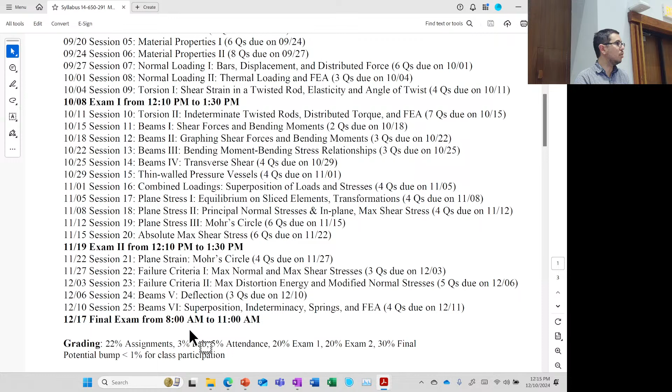As we were discussing casually a few minutes ago, my advice for the final exam is the same as before. Please look at the previous exams, please review them. If there are things you don't know, if there are steps you'd expect questions on, the steps on how to go from this to this to this, send a message in the GroupMe, send me a message over Canvas. We've got some time, try to communicate and work through any bugs there might be. I'll say that if you go all the way back to 2015, there are still some bugs in one of those exams, based on some of the beam bending stuff we're covering today. So if a few things look a little funny on boundary conditions, it's okay, the solutions were a little wonky and I haven't gotten back to fix them. There may be other issues. If you have other questions about the solutions, just send me a message, and we'll hopefully clarify anything you're struggling through. I do want the learning to continue.

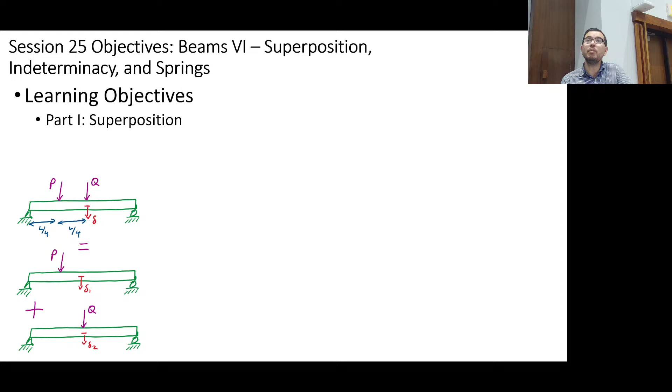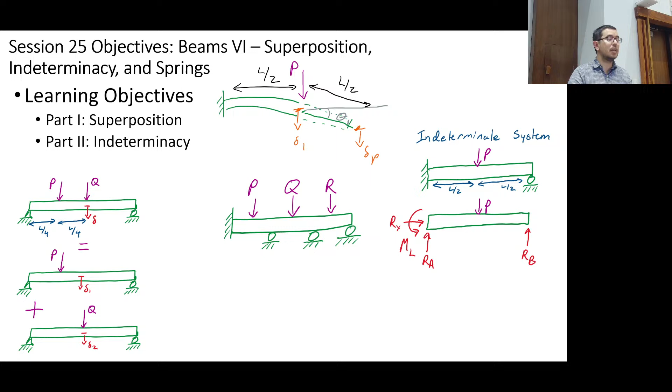Let's go. Our objectives today are to discuss superposition yet again, but now in the context of beam bending. We will also discuss indeterminacy and indeterminate systems. In some respects, these topics will be a bit of a review of things you've seen previously.

And then the last topic will be thinking about beams as springs. And yeah, if we could just tone it down a notch upstairs. Thank you. All right, awesomeness.

Okay, so I'd just like to emphasize for a couple minutes again why these topics are so important. Many of these things will be in tables. When it comes to understanding what the elastic curve looks like, you should find it somewhat familiar.

I don't think as an engineer you're often going to be asked, unless you're trying to get the job interview or the job, to calculate deflection curves. You may be given this type of sketch and asked to tell me what the bending stress is. It'd be a stretch for most job interviews to ask that, but handling beams is something you want to be able to do.

You may find yourself designing a particular tool or thinking about the end effector on a robot and how much it's going to be deflecting downward based on the weight distributed across it, because of gravity acting on that arm, or the type of load you're picking up. Having this general concept that bending stresses are going to be highest here at the torso, or where the arm connects to the rest of the body—having an idea of where to look to find out what the bending stresses are.

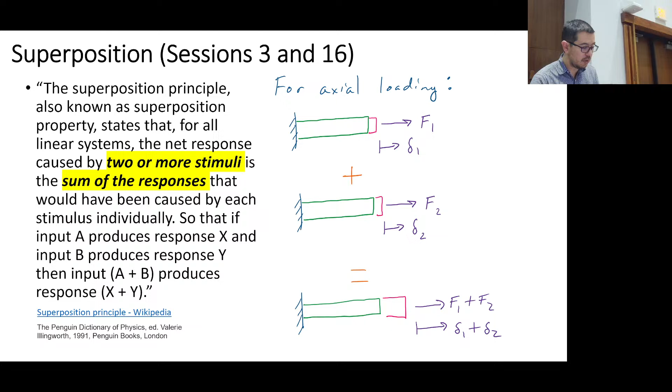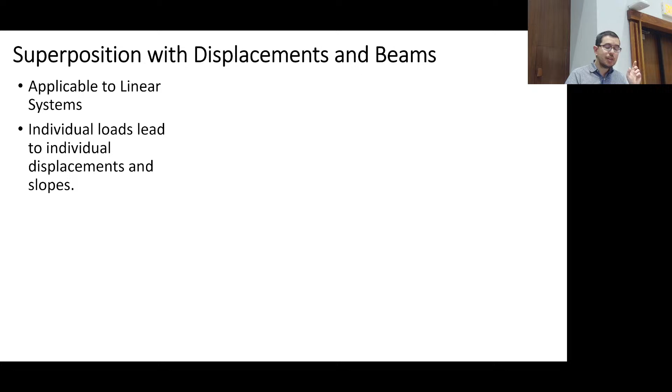Now, how do we do this with displacements and beams? We need to not just consider... So the nice thing about bars is that in many cases it's just extension, right?

But do you remember that problem, probably in session 4, where we had those bars hanging and there was a rigid beam, and then there was another bar hanging, and that rigid beam would rotate? We didn't even say it would deflect, right? But it would rotate, and then that made everything a lot more complicated, right? And there's a whole Python script to handle that issue.

Okay, in a regular beam, we have now understood from last time that it's not just displacement, but also slope that we have to keep account of, or track. So for that type of situation, it can be important to remember...

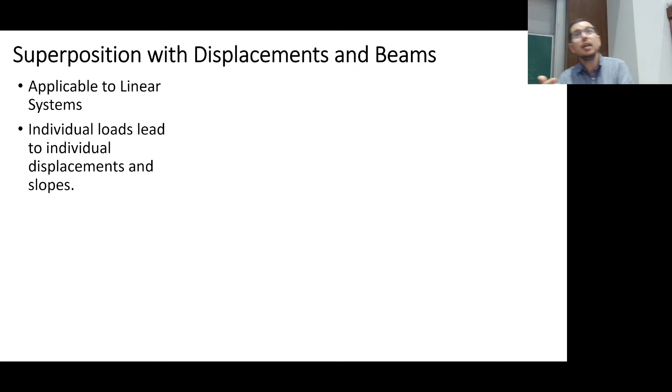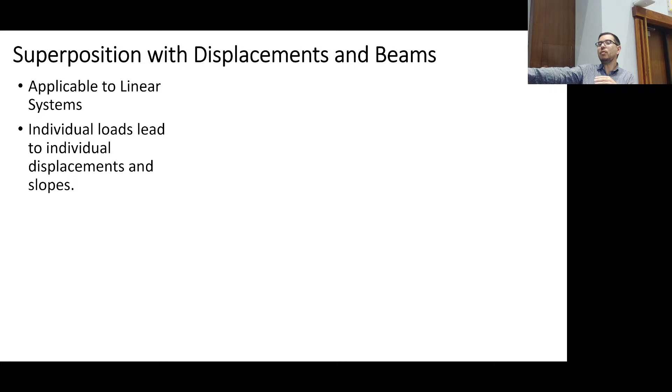When I have a member that's at an angle, even if there's no additional deflection, like no curvature here, right? If I have a slope at this point and there's no additional curvature, this point is obviously lower than this point, or this point is going to be higher than this point. But I can calculate that out. I can figure out how high or how low it is based on the angle at this joint.

So when we do superposition, it's not just going to be, okay, add this displacement to this displacement to this displacement. It will also have us think a little bit about where that endpoint is out there. Even though, as I say, there are often members that have zero bending stress, zero shear stress in them, and they're just along for the ride. But geometrically, being along for the ride has significance.

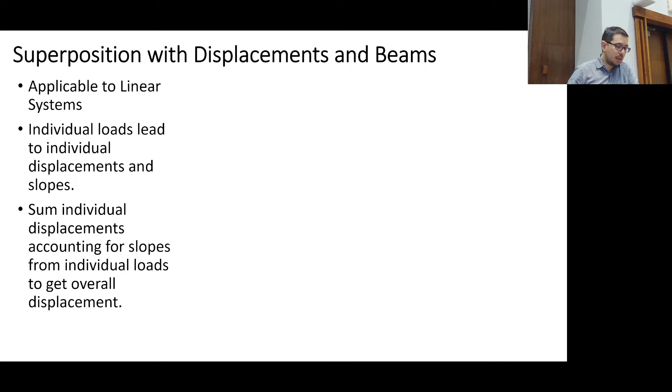So we'll be able to look at some of these, sum of individual displacements. We'll have to account for the slopes from the individual loads also, to get overall displacement.

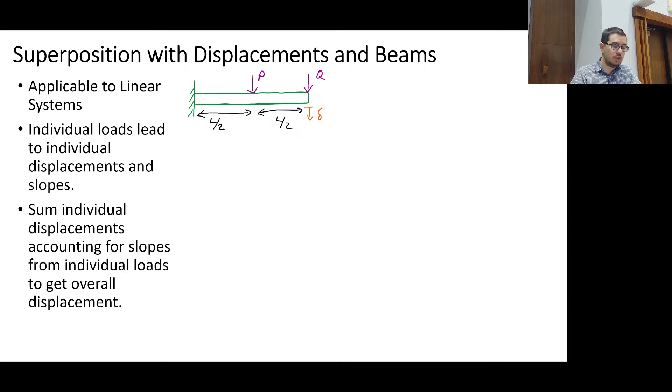Here is a beam that has two loads on it, P and Q. These are concentrated forces. If we want the displacement at the end, how would you go about breaking this up? Just quickly, how would you go about breaking this into a problem that's maybe a little simpler? I want the displacement at the end. Yes? Break it up into two sections, so you do the deflection for either section of L.

Okay, so that's interesting, that's one way to do it. Now let's think if I have tables. I don't want to do it like that - I have little expressions that tell me the deflection along the beam, and I also have tables that show me the slope. And I don't want to do any equilibrium. Now, how would you take this thing and break it down? You don't want to do the method of sections if you don't have to. Yes?

Deflection by P and then deflection by Q. Right? So I could look at the system in terms of the deflection at the end due to P, and then also look at the deflection at the end due to Q. And if I have tables for those two values, I'm kind of done.

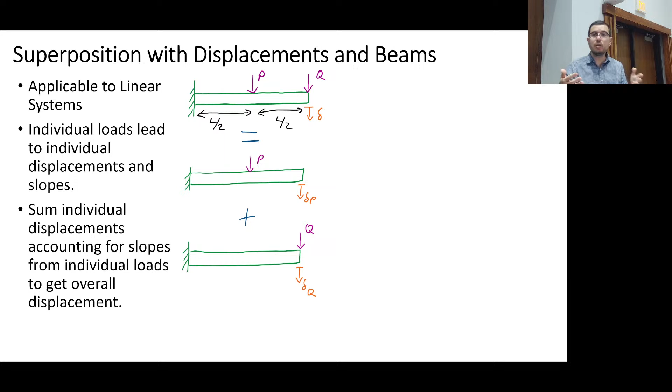But what we're trying to get here is that there are ways to essentially not cheat, but not do the EI second derivative of little v versus x equals m, all those calculations, if you already have tables. In a cliche way, we're trying not to reinvent the wheel every time. That's what we're doing. So here we can say that delta is equal to delta P plus delta Q.

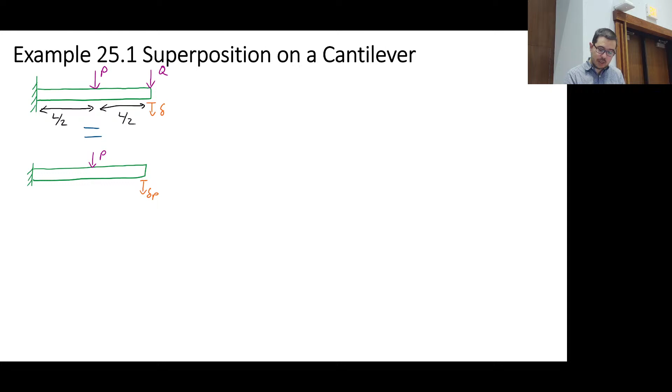Okay, so superposition on a cantilever, right? Same problem. Now let's go into a little bit more detail of how this works. So we're going to, once again, say, all right, I want to know what the delta P is, the delta due to that P at the end of the beam, even though P is not at the end of the beam. And we want to know what the delta Q is, even though the Q is right on top of the delta Q. So anyway, it's not really that relevant.

But this one, you can kind of see, is exactly like this, right? Everyone hopefully can see that. So that Q, I just pop in Q, and that's my displacement at the end from Q. Yeah, and of course, this is a little v max. That's how we often write it. And we would write this as the little v as well, okay?

It's important, though, to be able to take information from tables, and even though it's not using exactly the same thing that you've got in a textbook or you've seen before, you can infer. I think that's one of the things that's also probably a little bit hard about this class, because if you look at the previous exams, some of them are hand drawn, or they're just pretty simple diagrams—no shading, no real fun things like from a textbook. But I don't know, I think some of us, if we saw the textbook problem, it'd just be soothing and comforting, and we'd get less stressed or something. But it's important to be able to make that jump.

So now, this expression right here, where did this one come from? This one comes from right here, okay? So this is the px squared times quantity 3L minus x over 6EI. This is just for the cantilever, right? So once again, we write it out, and that's the expression. And notice I didn't put the negative sign there, so I just got to be careful. I know that's going to be downward for this particular problem.

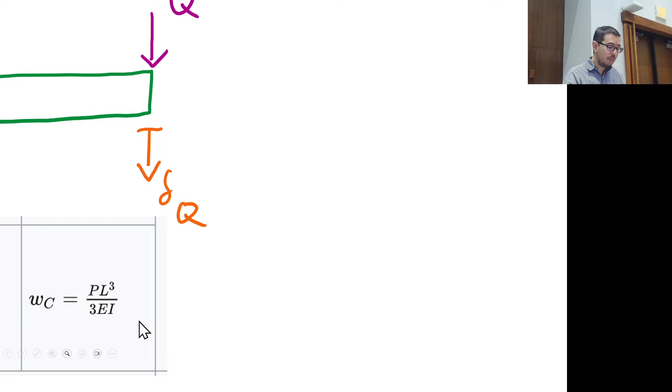This equation is when we plugged in the total length of the beam, L, right? And this equation is the maximum deflection at the end of the beam. All right? I have now essentially taken this problem to be an entire beam, but it has length half of what it used to have. Okay? Do you see this? This is important. You want to be able to visualize this a week from today.

Okay? Because people will plug in L over 2 into one of these 2 equations. But do you see how plugging in L over 2 into these equations is just taking this problem and figuring out what the displacement is here? I don't want to know the displacement. I don't want to know the angle here. I want to know the angle here when P is being applied on a beam that's half the original length.

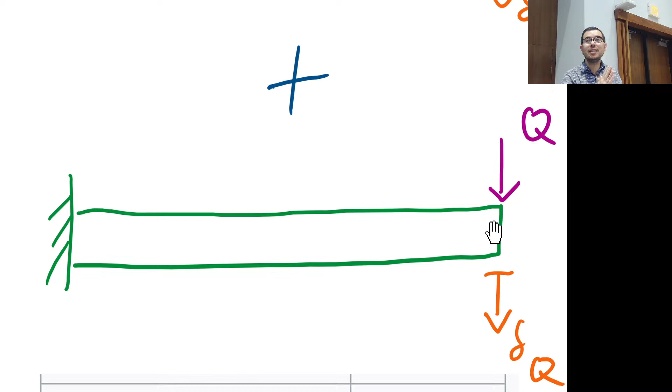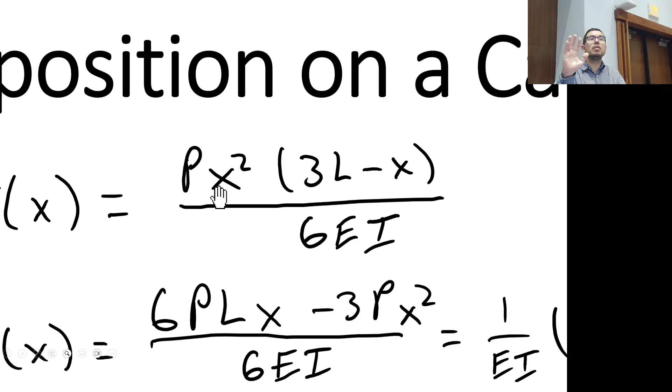Okay? Am I making sense? All right, so you could do a couple of things. You could say, oh, I'm just going to plug in L over 2 here, and I can plug in L over 2 here, and L over 2 here, and that would give you the right answer as well.

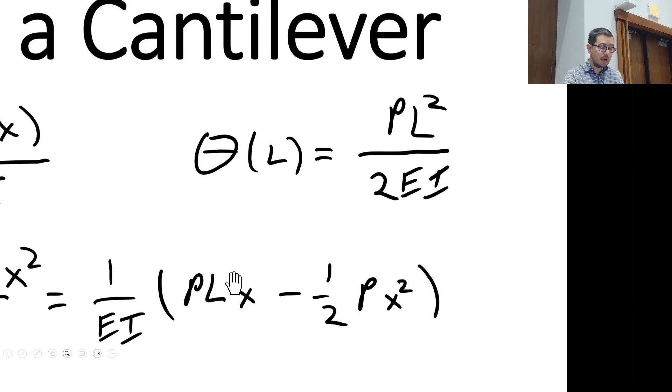Okay, but you got to switch this L over 2, this L to L over 2, right? But this one, it's already done for me. This is the slope at the end of the beam as well. We're going to use that in a second too, all right? This one, not done for me, okay? This one is still using a beam of length L, not beam of length L over 2, okay?

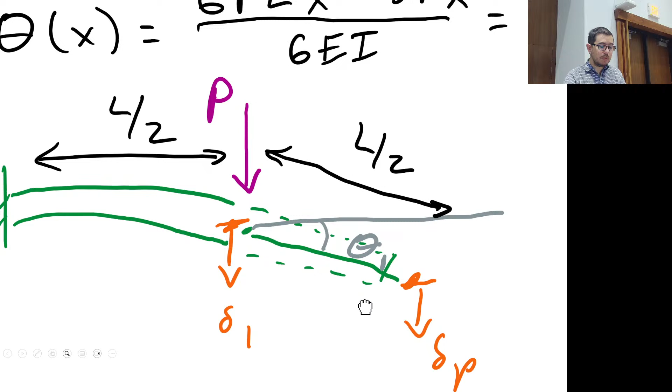This one down here, like we said, this one will give you the maximum displacement, which is what you want for a beam of length L over 2. Okay, it's a little bit of a mind bender. Okay, this is maybe not how you think of superposition. It's an opportunity to expand.

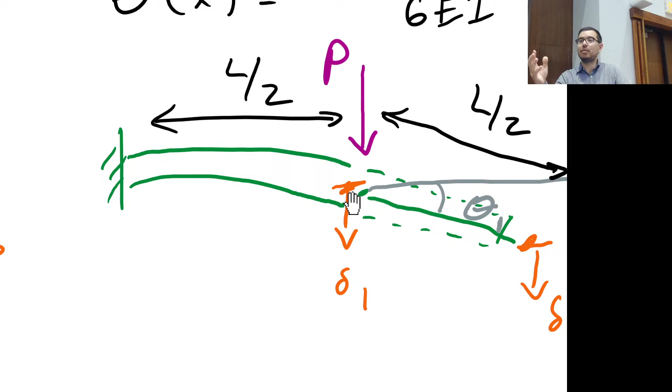Okay, now, what's the other important quantity that we need here? Theta. All right, we need the theta. So we got to be careful here when you calculate it out, because theta, right, it has like a negative slope. Okay, so whatever, you can say, well, if it's a positive number, just make sure that you're thinking that it's going further down. Okay, so you're going to add whatever you want to do. You want to get to delta P, you want to take this value and then add to the additional displacement that comes here.

How do we figure out what the vertical displacement is? If I know this angle, how do I figure out what this additional... so this, from this gray line to this point here, how do I figure out what that value is? If I know theta. Yes, Stephen.

Oh, it's okay. It's okay. This is the first time we're doing this. Others? Mark? Okay, so you can do it, yes, in terms of sine theta, all right, if you want.

But sine theta equals what? Sine theta would be equal to this opposite side, right, over this hypotenuse, right? And what's that hypotenuse? L over 2, right? That's the hypotenuse. Okay. Now, in reality, if you wanted to do tangent of theta, you could too, because these angles are typically small. Okay, so there's not going to be a big difference. So if you said tangent of theta, that's this divided by this length, and you said this adjacent side is about the same length as the hypotenuse, you would be fine as well.

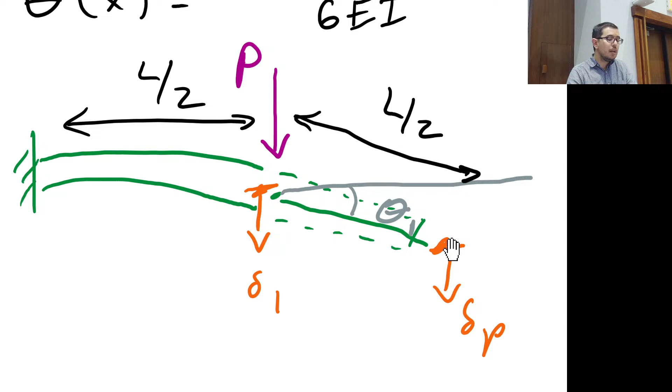Yes, Jonathan? Can you explain a little bit more what the difference is between theta L and theta x? Sure. Theta x is going to be the slope as we go, okay, in particular, don't look at this one for a second. It's going to be the slope as we go along the beam.

Okay, theta of x. And it has a very specific loading where the load P, or in this case Q, is at the end of the beam. All right, so that is here, if I were to use this equation, I need to make sure I take out this L and put in L over 2, because that is what the length of that's the overall length of the beam I'm interested in. This other portion is just along for the ride.

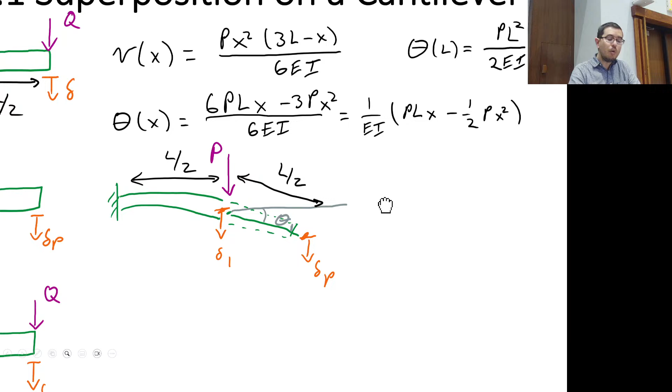Or I can shortcut and just come over to here where I've already defined my theta as theta at the end, okay, of the beam, and say, oh, it's not really L, it's really L over 2, and I plug that in here. So I'd have, just to be clear, that'd be P quantity L over 2 squared, so that's going to essentially divide everything by another 4, so I'd have PL squared over 8 EI.

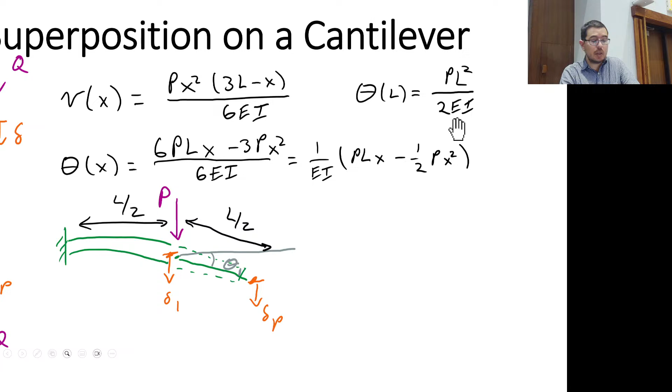Okay? Okay, and then also, you would be doing this twice, once for P and once for Q? Not exactly. Well, yes, we will be doing the displacement for Q, okay? But for that one, it's at the end, and so we can just use this equation right here and plug in Q with the L.

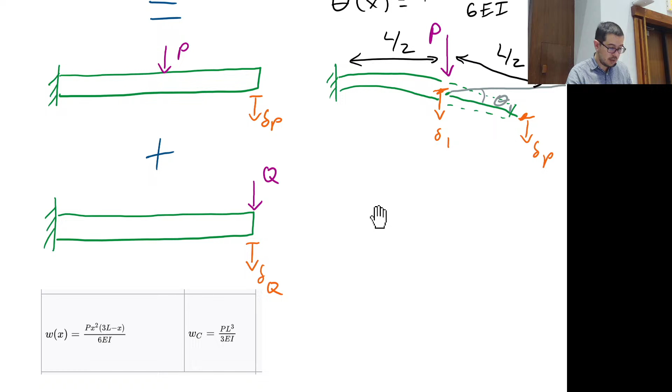All right, because look, what do we need to, let's see, we need to do a couple of things. We need, okay, if we go back, remember, our end goal is to figure out what the displacement is, the overall displacement is at the end. That is just equal to delta P plus delta Q. Delta Q is the easy one, all right? That's just the PL cubed over 3EI, okay?

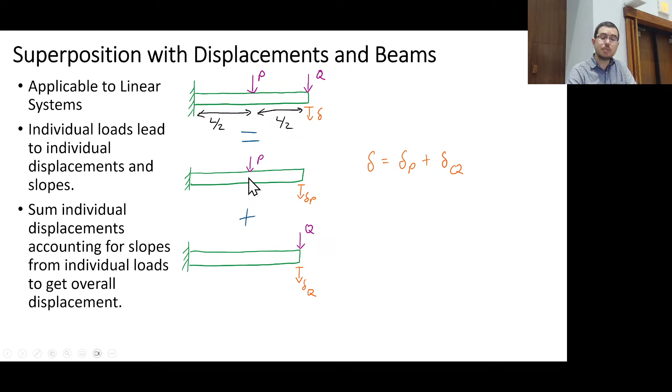But we don't use P, we use Q. That's QL cubed over 3EI, right? But to figure out what the delta P is, that requires this extra nuance for the delta and the displacement at the midpoint. Okay? Hopefully that's clear. If that's not clear, please go back and understand this before Tuesday.

All right, so here's a little more detail. We need the displacement little v, or delta 1, and theta, where delta 1 is equal to PL cubed over 8 - that's substituting L is equal to L over 2 into this equation down here. And theta 1 is coming from this equation where we've plugged in L over 2 over L, so that gives us PL squared over 4, which becomes PL squared over 8EI. Clear? Or clear as mud?

Okay, so the hard part of the problem is over. Well, it's actually not quite over, because now we need to figure out what is delta P. Delta P is going to be this delta 1 plus the L over 2 sine of PL squared over 8EI.

Remember, sine is the opposite over the hypotenuse, so really we're looking at sine of theta is equal to, I guess we could call it, the extra delta along for the ride, over the L over 2. Okay, that's what we've done.

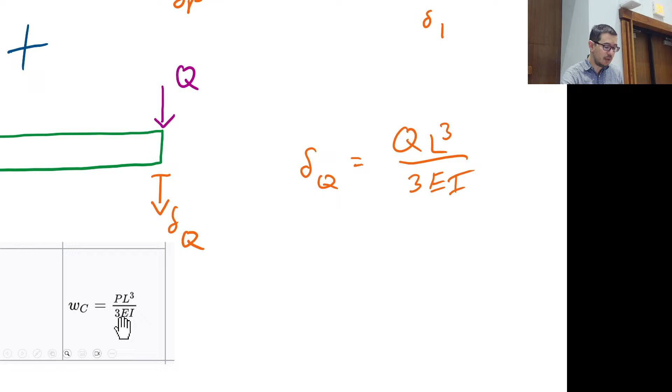Okay, so oh yes, and I guess I can write the word sine - one abbreviation is just to write S, but I'll go ahead and write out the word sine. So delta Q is equal to QL to the third over 3EI. You see, that is just the transplant from this equation down here - nothing funny happening here, just Q for P, P for Q.

So now I can add the delta P and the delta Q to each other, and that's going to be the overall displacement. Any questions? Concerns? Okay.

So this is how to use superposition. So you might say, it's just easier for me to go through the whole double integral thing. For some, sure, maybe. But maybe you don't want to do the whole double integral thing, because this is not a trivial problem - you've got like an x1 and you probably have an x2 either coming from the other side, or x2 coming from the same side, or x2 starting in the middle. So you've got a number of things to negotiate to do this.

Or you could just open a book and find - I bet if you look on the internet you'd also find this exact problem, to be honest, where you have two loads along a beam. Okay, now I see people are still thinking or writing.

Let's go ahead. Yes, Jonathan? Maybe you're going to go over this later, but how would this translate if we had like what we had in the second question of the homework, where it's not a force but a moment? Oh yeah, okay.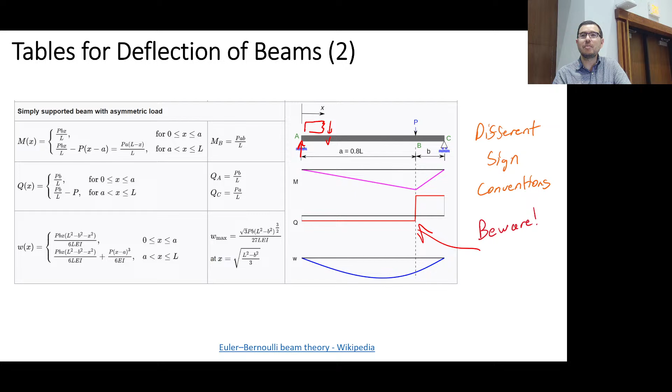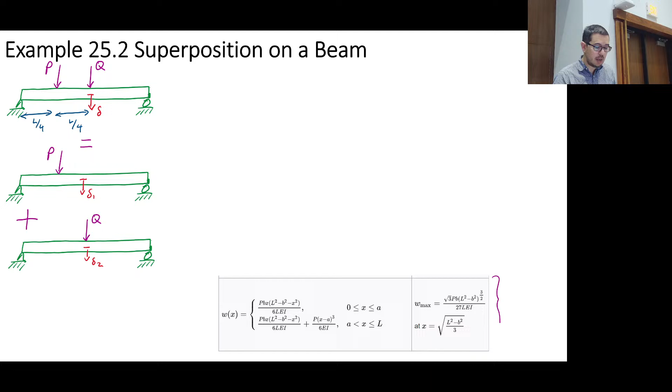I'm going to go through this quickly because we've got stuff to talk about. This problem is pretty straightforward, more so than the last one, in that we've got to plug in the appropriate L/2 for B... nope, not the L/2.

We need to think about where our deflection of interest is, because this load is here. So the X is beyond the A. Our point of interest is at L/2, but the A itself is only L/4. So A for this first one is at L/4, B is 3L/4, and X is equal to L/2.

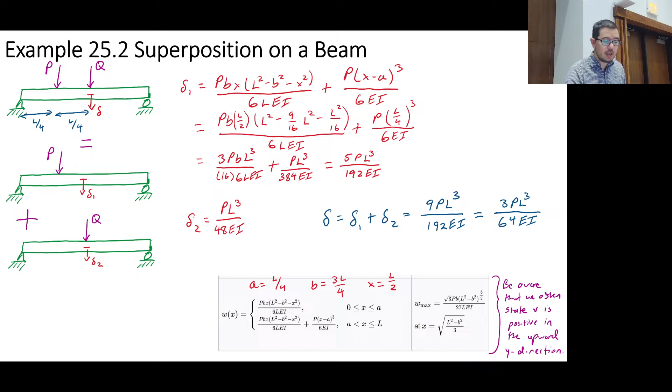This delta 2 is pretty straightforward, because this one is just the L/2, and you could plug that into the top equation, or look at the W max, since that would be halfway across. So we can add these together, and this is the result. This one is a little more straightforward, although more algebraic in nature.

Now, indeterminacy. This is significantly more difficult to understand. Remember that when you have an indeterminate system, the number of unknowns is greater than the number of equations you have. A determinate system is the opposite - you have nice balance and equilibrium.

Equilibrium means more than just equilibrium of forces, because in an indeterminate system you still have equilibrium, but it's just not enough - equilibrium alone doesn't do everything you need it to do. Unfortunately, the real world is not only about determinate systems.

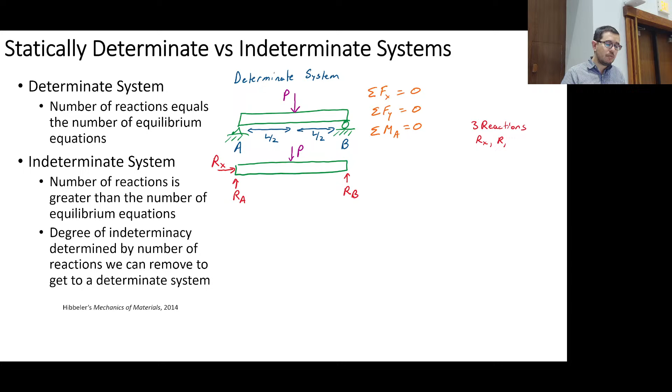We can use those equations to figure out exactly what the external reaction forces are, and also the internal ones. For an indeterminate system, we're going to see how many unknowns we have here - we have 3.

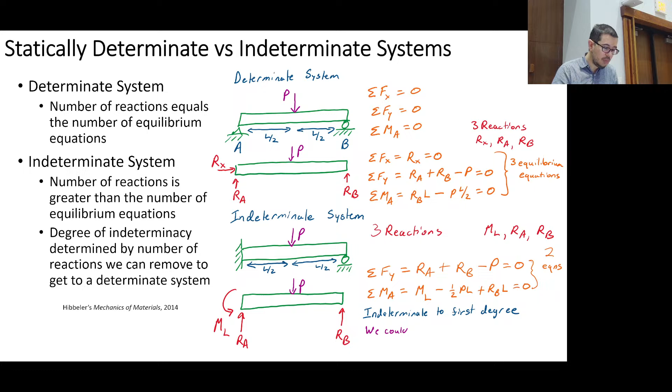The unknowns are the external loads. We don't know them, and how many equations will we have that are relevant? We will have just 2. It means that we can't solve for all 3 unknowns, so this is indeterminate. Another way to think about it is to just remove one of these supports. If I can remove it and it still doesn't fall over, then it will be determinate, or it could still be indeterminate. But it is indeterminate at the start because I can remove one of the constraints and not have it fall over.

How many degrees of indeterminacy do we have for the following? Here I can remove the vertical force constraint and also the moment constraint at the right end, or the same thing at the left end. So this one is going to have indeterminacy of degree 2. We remove the right or the left wall, and if we do that, we still have a not-falling-over system, and the wall had 2 reactions, so it's 2 degrees of indeterminacy.

Let's go to this next one. How do we convert it to a determinate system? Well, we could remove this one. Sure, that would just be overhang. We could remove this one too, right? Sure, that would be overhang. We could remove this one too, right? That would also be just a wall supporting all 3 of those point loads. So this has 3 degrees of indeterminacy.

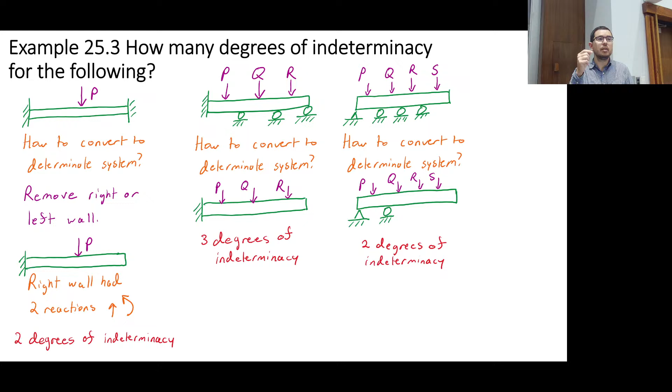And this one: we can remove this one, we can remove this one, but if I remove this one, whoop, it falls over. So this has indeterminacy of degree 2. I think it's simpler, once you look at these a little, to think of what you can remove without having everything fall over, than to go through the equations and figure out how many equations versus how many unknowns you have. But choose the way you want to solve it.

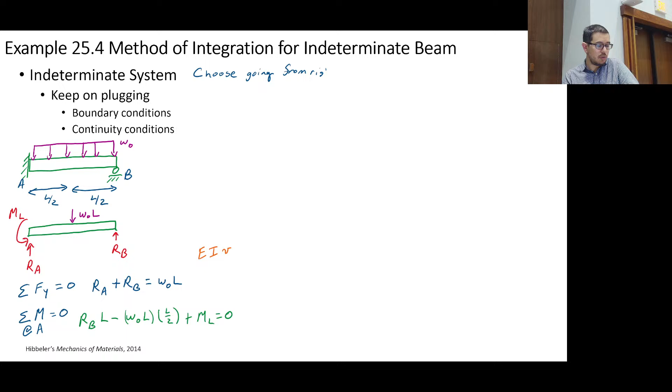Now, method of integration for indeterminate beams. Basic idea: keep on plugging, use continuity conditions, and go forth and prosper. I have one already online for you, so you'll see this method. You first want to perform external equilibrium and then get frustrated that external equilibrium is not enough. It can't be enough if it's an indeterminate system. You're not going to be able to solve everything. That's what happens here. We get frustrated that we can't figure out what all our unknowns are. We have RA, RB, and ML, and just cannot. We need to explore other options.

In order to solve this type of problem, we can write some expressions for the bending moment and the shear force that do not have all unknowns in them. We can keep track of these unknowns, and then we have to link to the constitutive relationship where EI times the second derivative of v with respect to x is equal to the bending moment. Here is an expression for the internal bending moment, and I have an unknown in it — I don't know what RB is. I can go ahead with my constitutive equation and write that out, setting it equal, and then do an integral. It's an indefinite integral, so we'll have a constant there.

We could do another integral, and then have 2 constants there. Or we can look at boundary conditions here and say, oh look, the slope coming out of this wall is 0. So that means C1 will be equal to 0, because at x equals 0 the slope is 0. There are different ways we can attack this problem. At x equals 0, we also know that v is 0, so C2 is equal to 0. And then we can also say at x equal L, we know that...

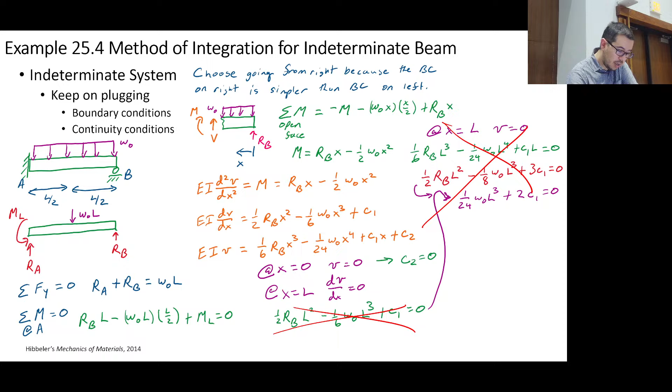Okay, so once again, you see that I or any of us can make a mistake. So this is a case where, no, this is not correct, and I'll send out a correction on this. Do you see what I'm saying here is that at x equals 0, dv/dx is going to be 0. That's coming out straight.

And when that's the case, then we just have c1 equal to 0. And since c1 is equal to 0, the resulting expression that we have is just going to be 1 over EI, 1/6 RB x cubed minus 1/24 W naught x to the 4th, like that. Yes, we can say that at x equals L, V is equal to 0, so that we can solve for RB because RB is unknown.

So I'll say this part no, but this yes. RB is unknown, so we use that relationship right there. Okay, I'm just going to skip that because I don't trust this stuff now since these things are not correct.

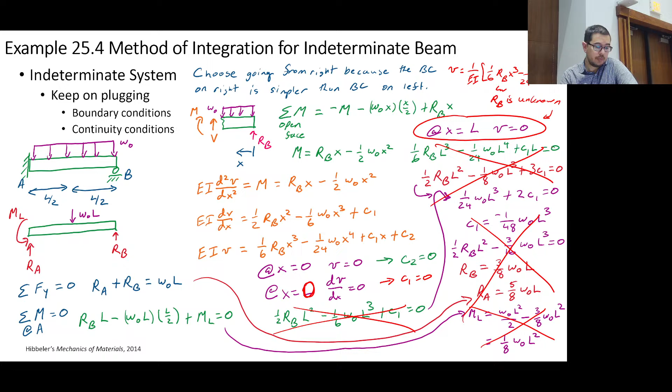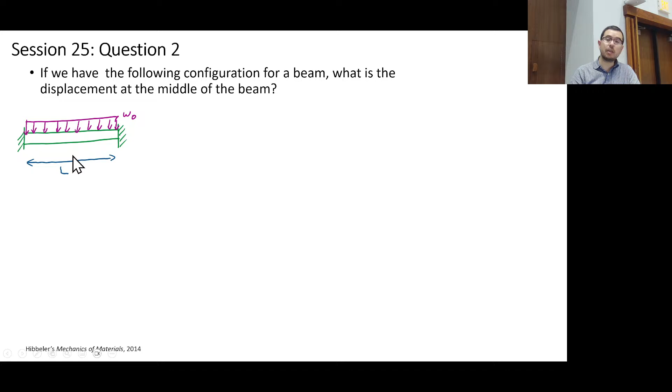Man, that's unfortunate. Okay, so for question number 2, this video is already posted, you can take a look at how you can use the integral method to solve for the deflection across the beam and then the displacement specifically at the middle of the beam. The answer is actually already there for you as well.

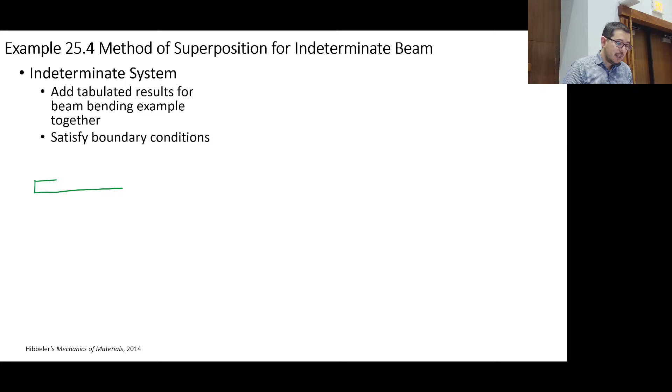So, method of superposition for indeterminate beam. This is tricky stuff, okay? We need to satisfy the boundary conditions and we need to use tabulated values. And for that, we will have these situations where you have, for example, removing one of the extra constraints, but then saying what is that constraint really applying to the system? It's just applying a force P.

And what is the overall displacement at the right side of this? If I'm looking at some type of expression, what is the displacement here vertically? Zero, right? So that means that this displacement plus this displacement has to equal zero. So we can say that since they're in opposite directions, better said, delta 1, if I say that's going positive, or delta 2 minus delta 1, either way, these are equal to each other, and that's because of this geometric compatibility that we have to hold on to.

The delta 1 comes from a table, that's just this value right here. This delta 2 just comes from the table for PL cubed over 3EI. So now, what can we solve for? The unknown here, well, delta 1 and delta 2, right? We don't exactly know what they are, but we know that they are equal to each other, so they knock each other out. The unknown is the P. We don't know what P is. So now we can solve for P.

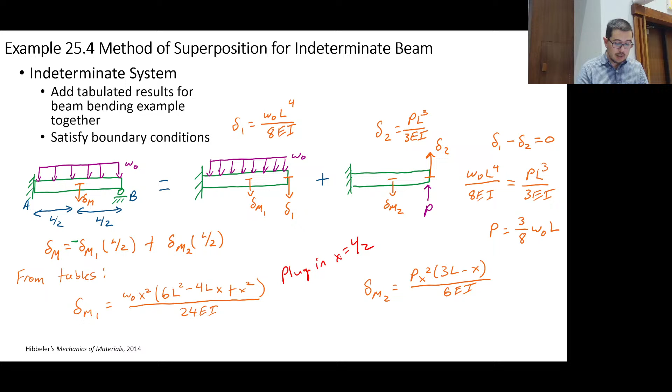Okay, so the resulting delta M, well, it's already here, right? It's this minus here of this guy, plus the delta M2 from this guy with x equal L over 2 from both of them. Whew. All right, question number 3.

There's a solution out there, and I'll have a video for you all as well to be able to handle this type of problem.

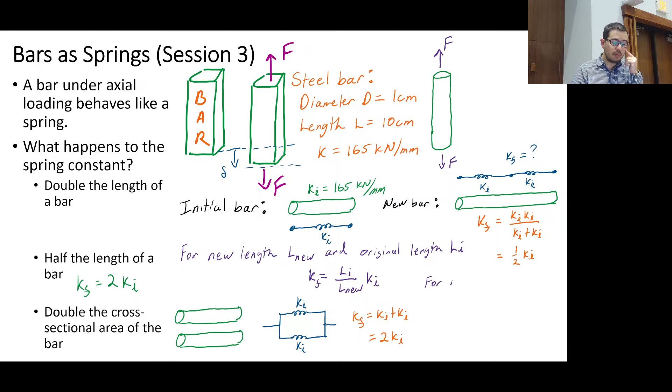And the last part is just to think about bars as springs again. Remember F equals K delta, and we have rules that we can use, springs in parallel, springs in series. And this is just for a bar, but the same principles apply. So we said they were often coiled devices, but they don't need to be.

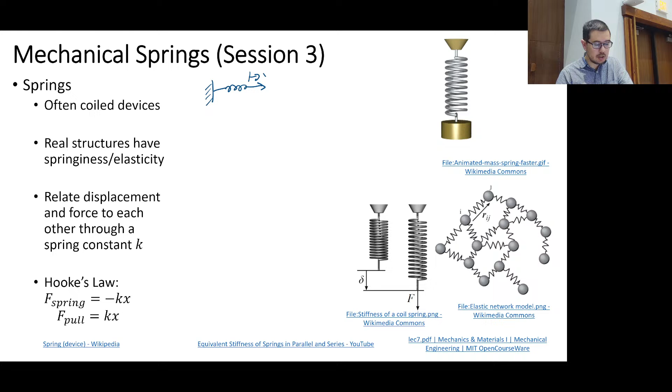This is just copied from session 3, so I'll burn through this. And this is from session 8, and this was when we were learning about bars. Remember what we said is that P is equal to K delta, right? This is the only thing that we really need to know. But we had this more complicated expression that related the displacement of B to A, or the deformation, and that was PL over EA. So what is the K? And with this equation, with this bar, what is the K here?

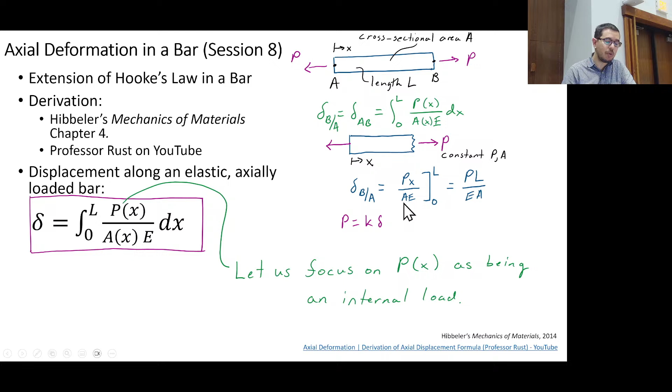What's the spring constant for this bar? Yes, that's right. That's it, because we saw that force equals K times delta.

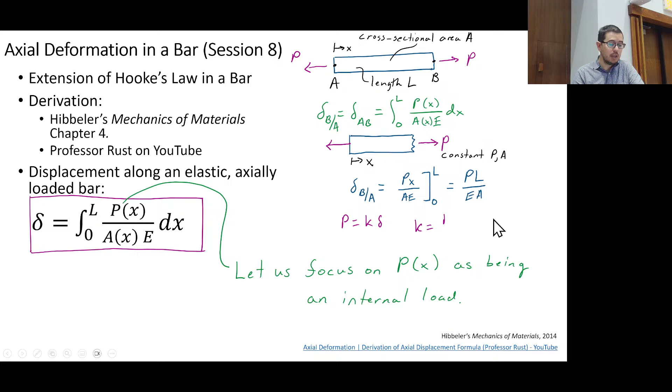So K has got to be EA over L. That's the same principle we're going to use for this type of system. If I know the displacement, say at the end, PL cubed over 3EI, I can say P equals K times little v, so K equals 3EI over L cubed. It's just the rate, the constant that relates the force and deflection to each other.

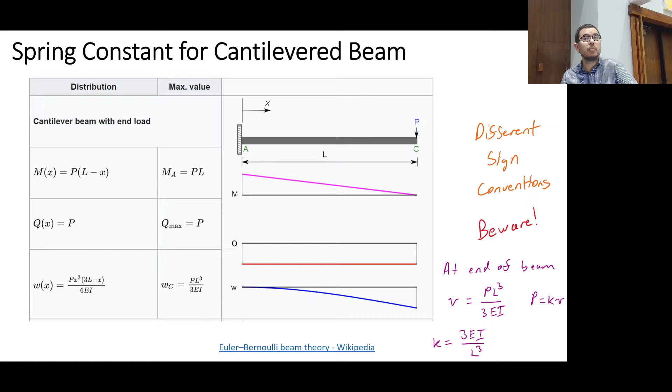So we can begin to look at other situations and ask, what's this effective spring constant? This is an example we've done previously. Here's another table that's maybe simpler to understand, where P acts in the middle at L over 2. We see the deflection is PL cubed over 48EI, which means the spring constant is 48EI over L cubed. That's it.

That's it for springs. I have one more example, but I'll skip that because I want to spend a few minutes going through a review.

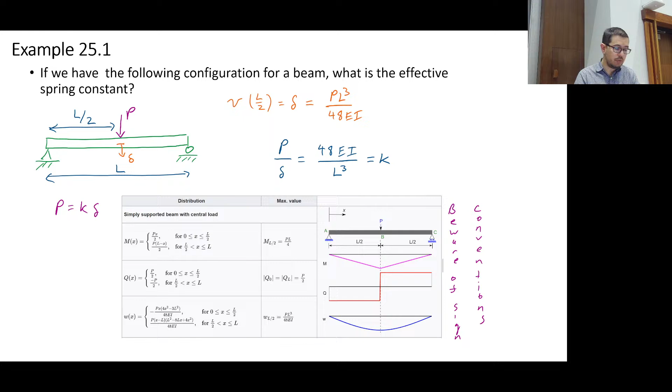So what we've covered today is how to use superposition, how to use superposition potentially with indeterminacy, but also how to basically handle indeterminacy, when we're doing a couple of integrals with EI times the second derivative of the displacement with respect to x equal to m. And we've also just discussed how we can think of beams as springs mathematically.

Any questions? Any comments?

If you have questions, send me some notes. You can take a look at some of the previous exams. They will have some tidbits on superposition, some tidbits on indeterminate systems. Again, my recommendation is to start with the most recent exams first and work your way backward.

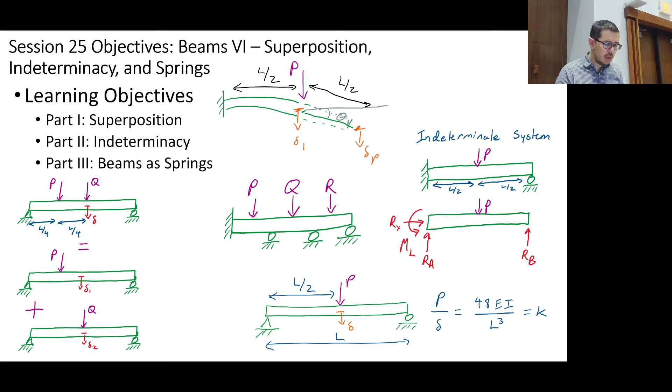Now let's just talk about the class overall and some of the things we've covered. And to do that, let's just go through the syllabus. I'll try to write down a few notes here.

At this point, I think everybody is familiar with units, and hopefully also with scaling relationships. Scaling relationships can refer to linearity and superposition.

That may not be exactly how we covered it in that first session, but if I double the applied force, I double the displacement I'm going to see in my system. If I double the applied loads or torques, I'm going to see double the shear stress if it's a torsion problem, or double the bending stress.

Or I'll even see things we discussed on the sigma 2, sigma 1 plot, right? Remember, this is going back just a little ways. Remember we talked about how you could have something that looks like this.

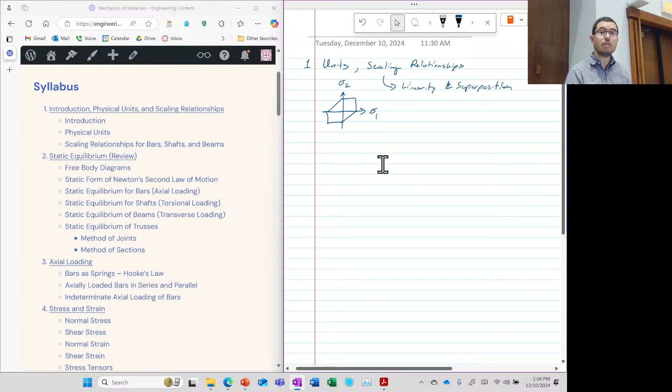That could be for Tresca, or it could be for modified Mohr. If these points are not symmetric, it would be the Mohr failure criterion. And if I had a point of concern, I can assume zero stress in the system when there was no load on the system. So if I were to continue stressing the system, I could form the line—this would be linearity. And I could then think about where my intersection is, to figure out what the safety factor is.

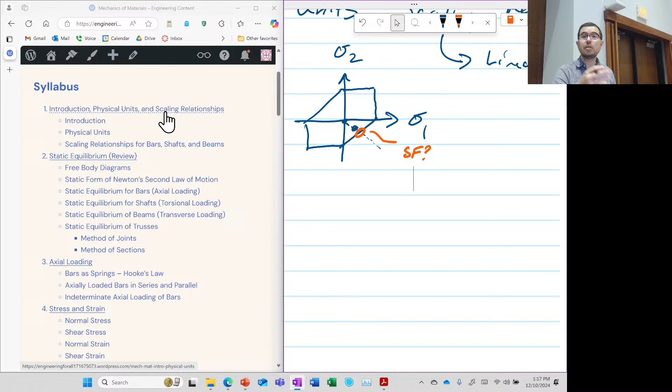So that might be a bit of a stretch, but that is an example of relationships that scale, and it goes to the very end. The units—I don't know what to say, please keep track of them.

What are the common units that throw everybody off? Well, the elastic moduli. You tell me, on what order are the elastic moduli?

10 to the 9th what? Pascals. Right, so 10 to the 9th pascals, and I'll even go further, it's really like 10 to the 11th, okay, often because we're at 70 or 210 gigapascals, right? So we're like 10 to the 9th to 10 to the 11th pascals.

Yield strengths, what order of magnitude are we? 10 to the 6th, right? 10 to the 8th, right? No, but I'm right with you. So I would say 10 to the 6th to 10 to the 8th, right?

And so prefixes, giga. Prefixes, mega. Okay? Please don't write a small m, okay? Please write a small k, though. All right? So, just because we got to be clear with the units and the prefixes that we keep track of. Poisson's ratio, dimensionless. Strain, dimensionless. Okay, keep those things in mind as well.

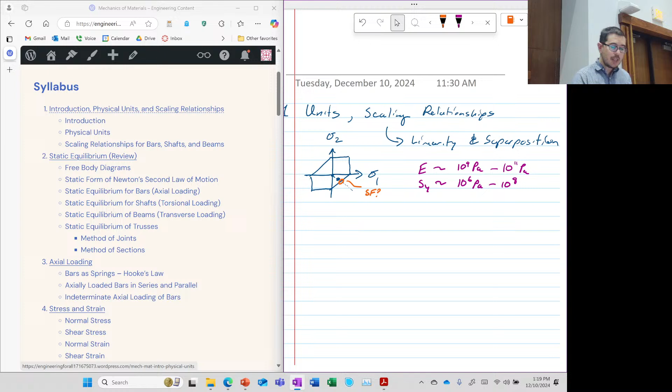Modulus of toughness, modulus of resilience. I don't know if they'll come up, all right? But what are the units for them? Anyone remember? Okay. Well, what do they represent? Modulus of toughness, modulus of resilience, right? Those represent the area under the stress strain curve, right?

So something like this. Remember that? This is a linear elastic, perfectly plastic model. Okay? Well, if I need area under here, the x-axis is dimensionless. Right? So I can take the area under here. It's just going to be the same units as the y-axis. So my modulus of toughness, my ME, my MT, okay, those moduli are going to be in units of stress as well.

Please remember how to calculate the elastic modulus. Okay, how do you calculate the elastic modulus? Yes? It's the slope of the elastic region. It's the slope of that line, right?

And if someone gives you this, let's just say they gave you that. How would you calculate the elastic modulus? Yes? It's also the slope. No. That would be K, right? The slope here, right, is the stiffness, right? Because that's P is equal to K delta, right?

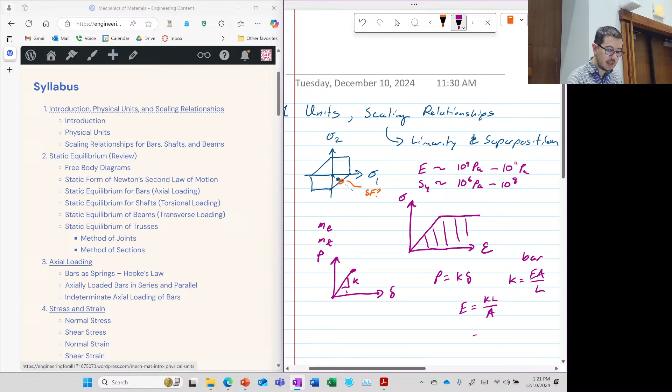That was kind of a coincidental thing that we were talking about, bars as springs. So that means that E will be equal to KL over A, and K is equal to P over delta, right? So that means that we have P, yeah, so that's going to be our PL over delta A. Of course, you have to pick appropriate points, right? But if you know the slope, you could calculate it this way, or if you know what some delta is for a given P, you can figure it out this way as well.

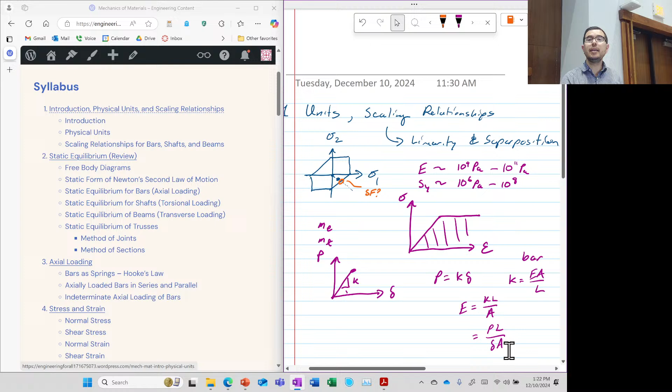Please be able to do that, okay? Other people in the department think that you're not being taught mechanics when they ask you to calculate the elastic modulus, okay? And I'm like, no, I'm telling you, we've covered this now, okay?

In aerospace engineering, okay, so let's go to 2. This is where we can talk about that. Okay, so static equilibrium.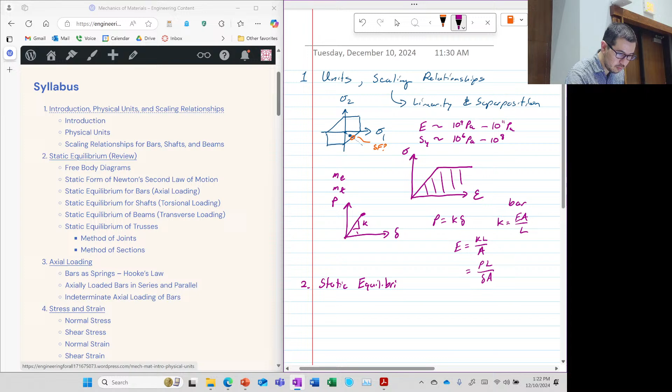Please, if you're given something that looks like this, okay, what is that? That's a football, right? No, I'm just kidding. All right, it's an airplane, hopefully. Okay, all right. And you have something like this coming out the back, right?

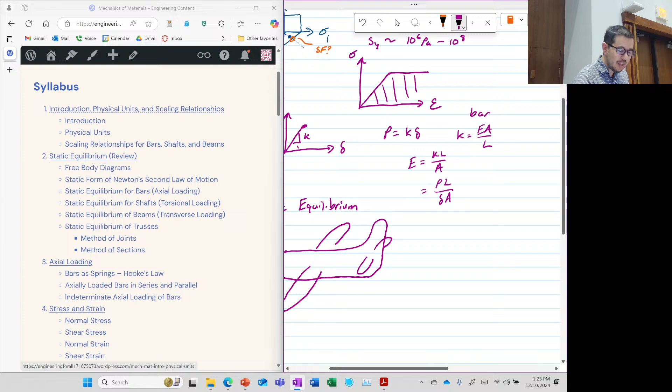Please understand, if this thing is not accelerating, this is a statics problem. What are the forces acting on this system? Yes. Great. Okay, where are the lifts? I drew 2 sets of wings. Right? Okay, so let's say that we have a center of mass there. Okay? And let's just say we have some FL1 here, and back here, we have some FL2.

How do you go about figuring out what these values are? And first of all, is this a determinate problem? We're not talking about beam bending. I'm just saying this is just straight up static equilibrium, okay? So how do you do this? How do you do this problem? First you say you're missing, you haven't told me something. I need some more information.

What is the more information that you need? Huh? Okay, no, I'm telling you it's a determinate system. What are you missing? You need? Is it standing on the ground or is it in the air? Okay, sure, we could add other information to it, but let's just say it's in the air.

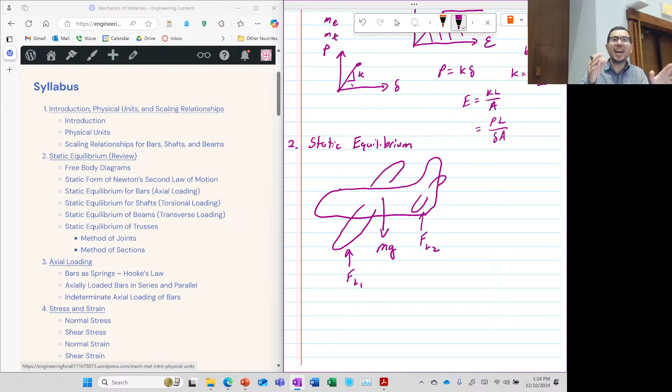Help me out, I haven't told you something very important, but can you figure out what FL1 and FL2 are? Okay, you gotta have some reference point. So let's say that this is L1 and this is L2 here, okay?

There's a certain aerospace professor who has given this problem to students in the past and then told me they don't know statics. I'm like, well, actually I don't teach statics, so it's not my problem. No, it is my problem, okay?

So, sum of the forces in the y has to be equal to 0. So that's FL1 plus FL2 minus mg is equal to 0.

Sum of the moments at a specified location, let's call the nose O. I also need to know this distance here, we'll call that Lg. But if I know all these distances, I can figure out what FL1 and FL2 are. It's a statics problem, right?

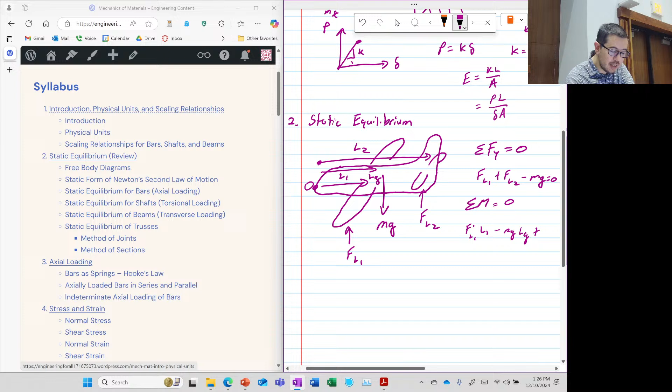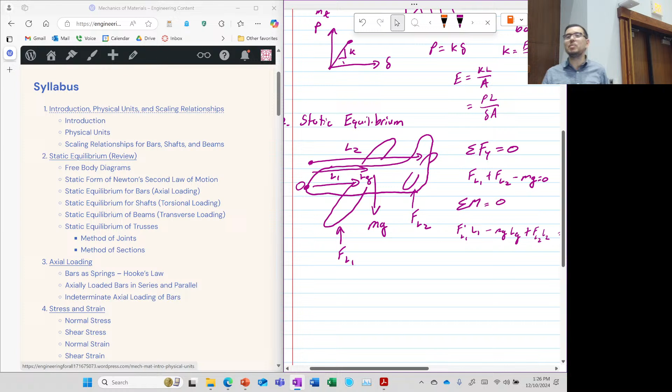Because here we'll say, okay, I have FL1 times L1, plus, or I'll say minus in this case, minus mg Lg, plus FL2 times L2 is equal to 0. It's not just tables, it's not just beams, it's not just bars, it's not just trusses. Vehicles obey equilibrium.

Now, yes, if it was a vehicle with rubber tires and you have elasticity, and you don't know what the displacement is, yes it can get complicated very quickly and be indeterminate. But in the air, this is pretty straightforward, okay?

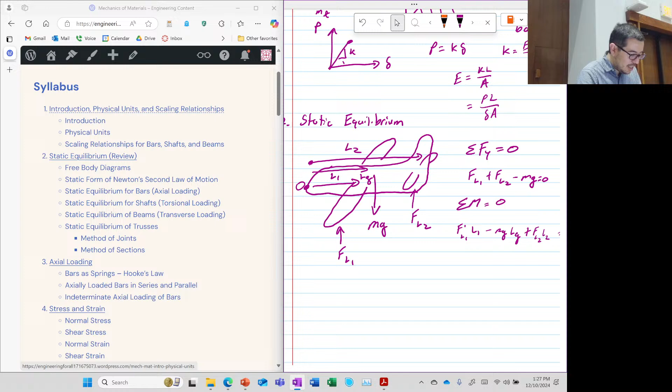Axial loading, okay, this is what I want to say on axial loading. And then I've got to wrap up, okay? Please, please, please.

If you're given, say, an Fy, that would be the yield force. First off, you should know that the yield strength is just going to be that F yield over the cross-sectional area. Correct? That should be straightforward.

Now, if I say let's use the criterion of Tresca, maximum shear stress, what you want to do in your problem is hunt down what the absolute maximum shear stress is. And I think you're like, oh, that's really easy, I know how to do absolute maximum shear stress. I just figure out what the principal stresses are and I draw 3 Mohr's circles and I'm good to go.

Please though, remember that what you are comparing to is also the maximum shear stress in this basic case. You don't compare the maximum shear stress theory, Tresca, you got to compare it to something. And if I give you a yield strength, you got to be like, oh, well now I know how do I calculate the shear strength, right?

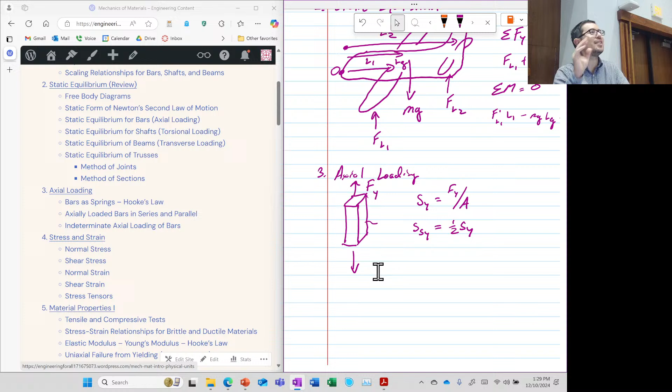Help me out, what is the equivalent maximum shear stress in this situation? No, that's a loading question, that's a transverse shear stress on the cylindrical cross section. I'm looking at this one right here. Yes, it's another Mohr circle.

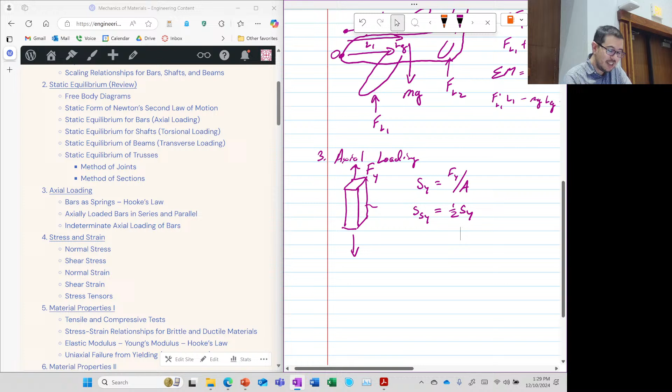And this is where we will end. This is a state of principal stress, this is out at SY. Remember this? Sigma 2 and sigma 3 are equal to 0, they're at the origin. Sigma 2 equals sigma 3 equals 0, that's here. So now I draw my Mohr circle.

And what's my absolute max? Which I'll call R, so the radius is equal to the SSY, which is equal to 1/2 SY, okay?

This is pretty important, because every test, every material that you ever use in an engineering application -- I'm not talking about when you go to Home Depot or Lowe's, you're like, hey, I just need to support this thing, I get a couple 2x4s and it's going to work. No, I'm talking about in an engineering sense, you're going to get material specs. Every one of those material specs, virtually every one, will have the yield strength of the material.

But virtually all the ductile metals fail because of Tresca, or you use von Mises. So then you're just looking at SY, but you should remember this.